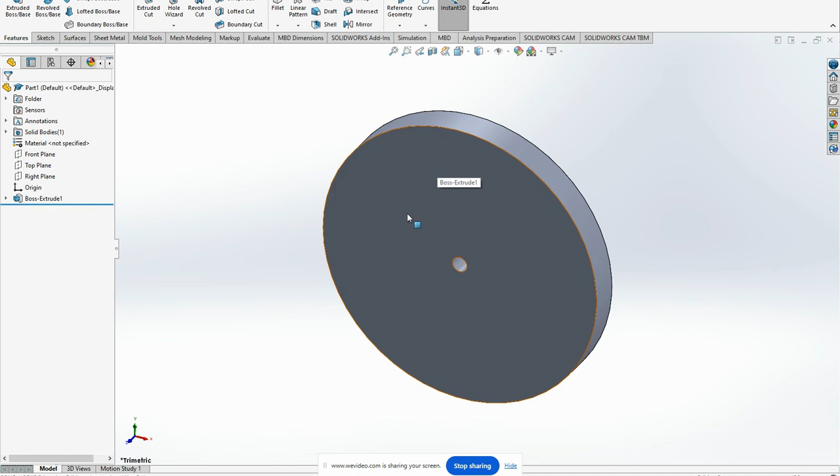Okay, to add marks on your clock face, we're going to start out first adding the major marks. I'm going to click on this and start my sketch. Now the easiest way for me to do this is probably going to be with a corner rectangle, so somewhere up in the 12 o'clock-ish area, I'm going to go ahead and draw a rectangle. It doesn't have to be the right size right now because I am going to size that in.

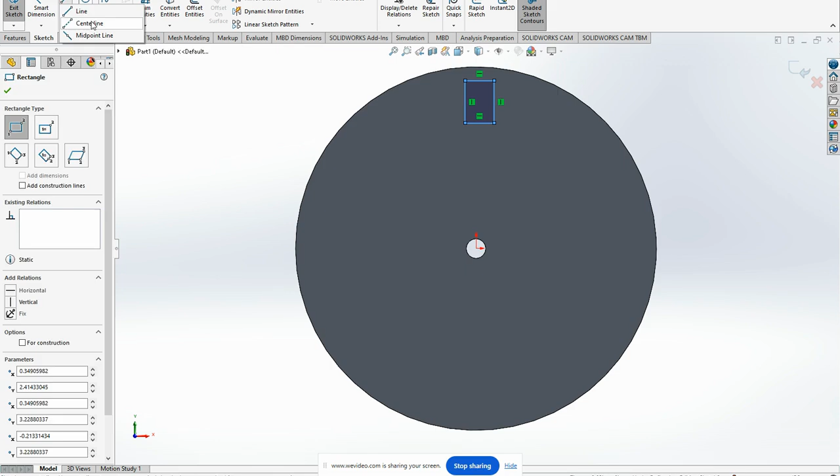I'm also going to grab a center line. My center line I'm going to draw from the origin, or the very center of the clock, up, and I'm going to very carefully select the midpoint. So you might want to zoom in a little bit, but I want to get that yellow point in the middle. That's very important, okay? Otherwise, as I adjust the size, I won't be symmetrical.

Now, as you can see, my line here is not straight up and down, so it's not exactly at the 12 o'clock mark. If I make that vertical, I now have the middle of the box straight over this.

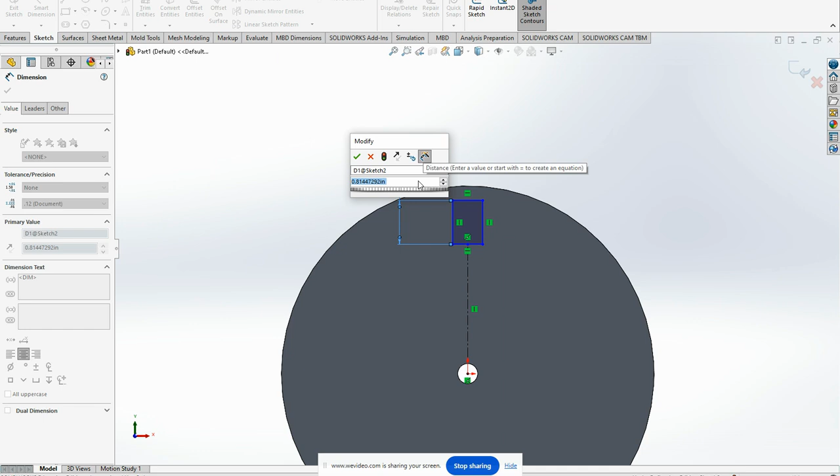I'm going to go ahead and get my dimension tool. I'm going to start out dimensioning this, and we're going to make it 1 inch. We'll see how this looks. And then when I go to set the width, I'm going to make it 1/4 inch, or 0.25.

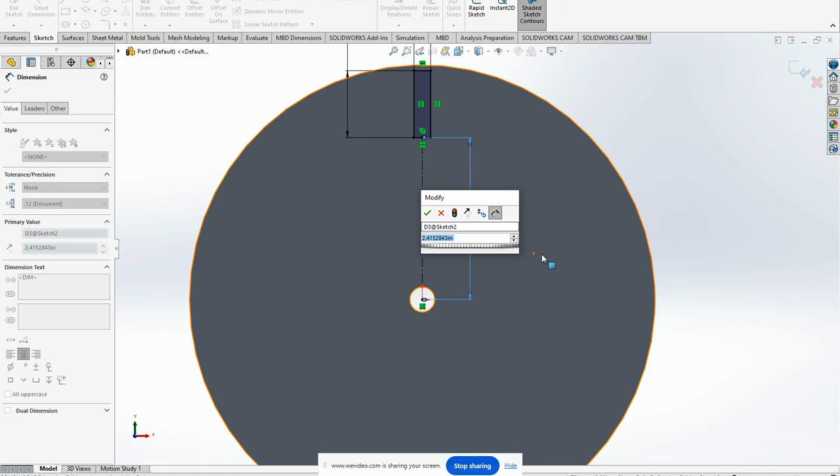Now the last thing I'm going to have is that's really close to the top for me, so I'm going to go ahead and grab this measurement and bring that down. I'm going to try 2 1/4. That looks pretty good, I think we'll leave that there for now. Okay, I can always come back and change it later.

I'm going to go ahead and exit my sketch, go over to Features, hit Extruded Cut, and set my cut depth for 0.125, or 1/8 of an inch. I don't need it in there real deep, but 1/8 of an inch will give you a nice cut so that you get nice crisp edges. Okay, I'm going to accept that.

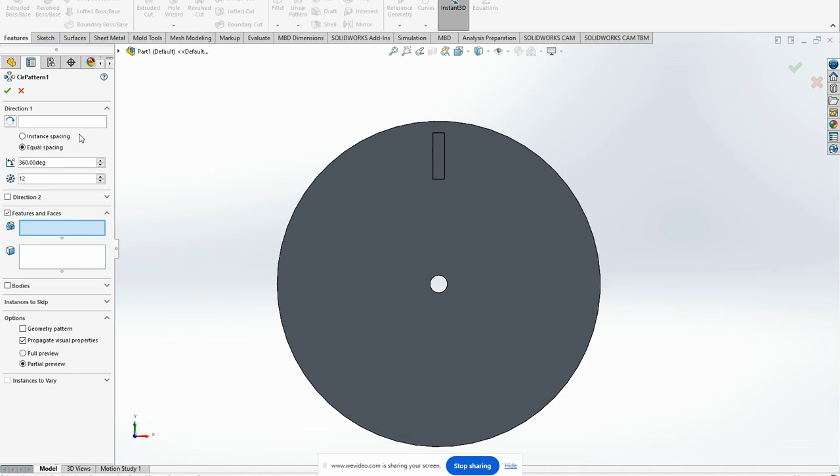Now instead of drawing that 3 more times to get my other major marks, what I'm going to do is use my circular pattern tool. I'm going to go ahead and click either the outside circle or the inner one — it does not matter — under direction. So let's go ahead and get that circle.

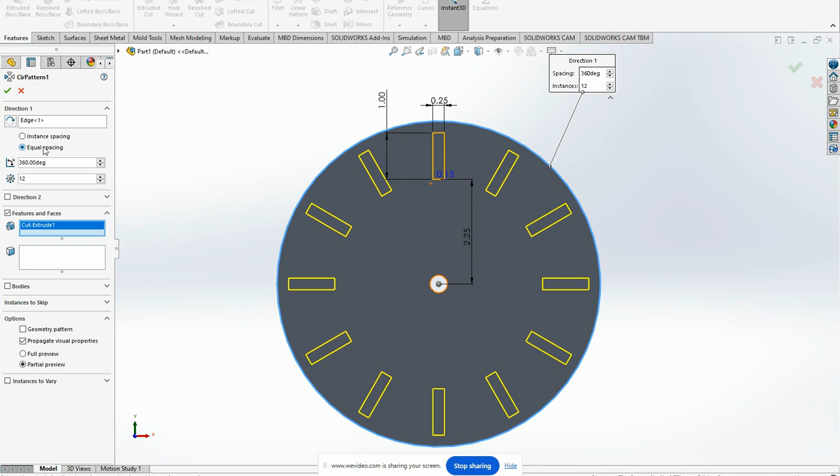Under Features, I'm going to click the cut here, and you're going to want to make sure you are set at equal spacing. Now, if I wanted all my marks to be the same size, I could go ahead and do 12 marks at equal spacing. This time I only want 4 total, so I'm going to get my 12, 6, 3, and 9. Okay, got my preview, that's what I'm looking for. I'm going to go ahead and take that.

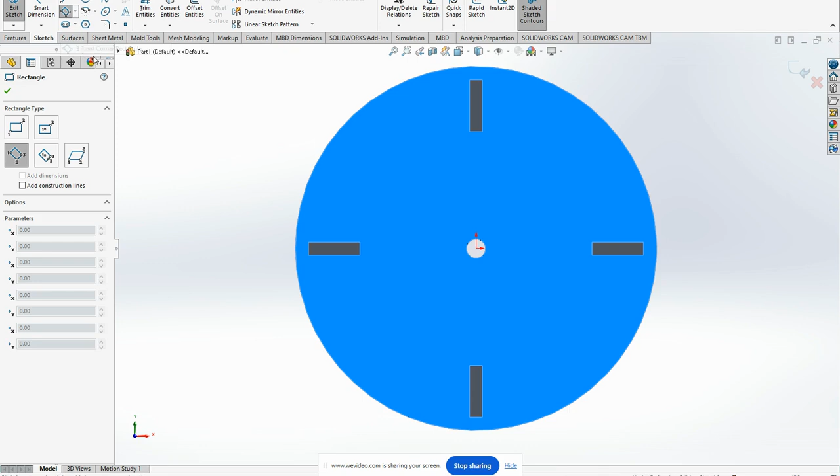All right, now I'm going to create the minor marks. So again, I'm going to start a sketch on this face. I am going to get the 3-point corner rectangle where it is already crooked. That just makes this process a lot easier because now I can draw a crooked rectangle. There. I'm going to do the same process with the center line, where I'm going to draw from here to the midpoint.

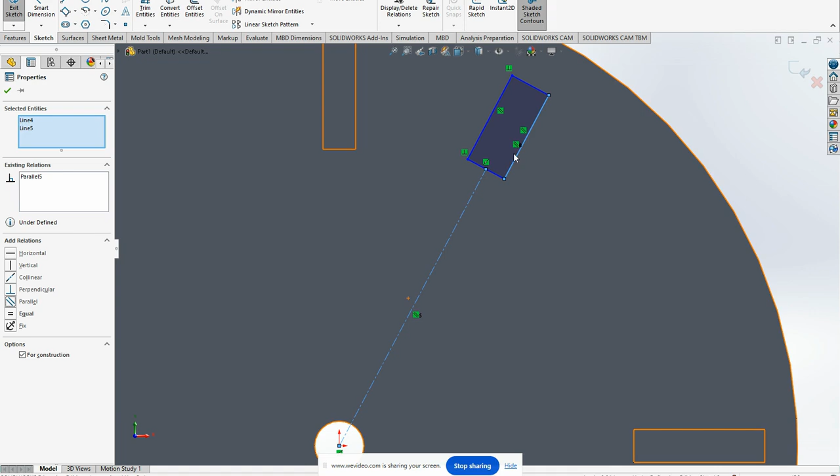Now this is a different step here, but I'm going to select my center line and one of the long lines while holding shift, and make those two lines parallel. Okay, that way they are parallel. As I change this, I've got a nice parallel edge there.

I'm now going to go ahead and size this one up. So I'm going to make this 0.13. I need to make it slightly bigger than my cutter, which the smallest cutter we have is 0.125. So rounding up to 0.13 will give me a line that it'll actually cut. And the height of this, I am going to set at 0.75.

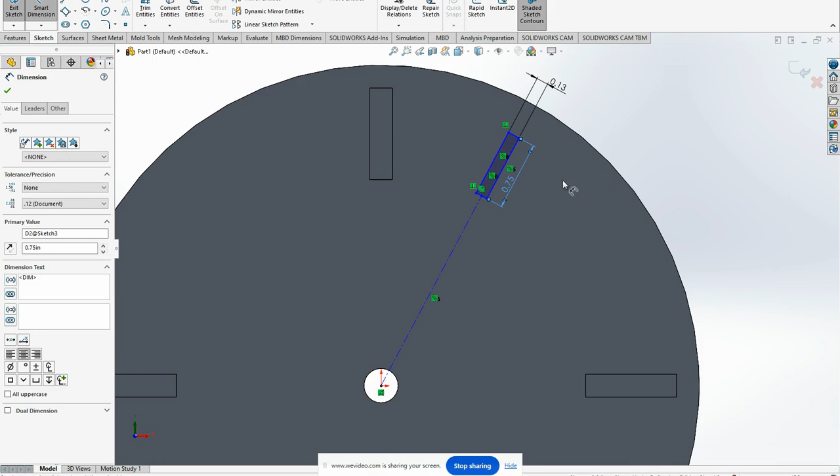And this is again where I can kind of mess with my spacing. But as I select this, I get 2.3 something or other. I'm going to try 2.5. Push it out a little bit. Nope, I don't think that's quite enough. Again, you can mess with this all you want. 2.25. Okay, and I can even come back and change it. You know what? I'm going to go right in the middle. 2.375 is 2 3/8, so we'll go right in the middle with that.

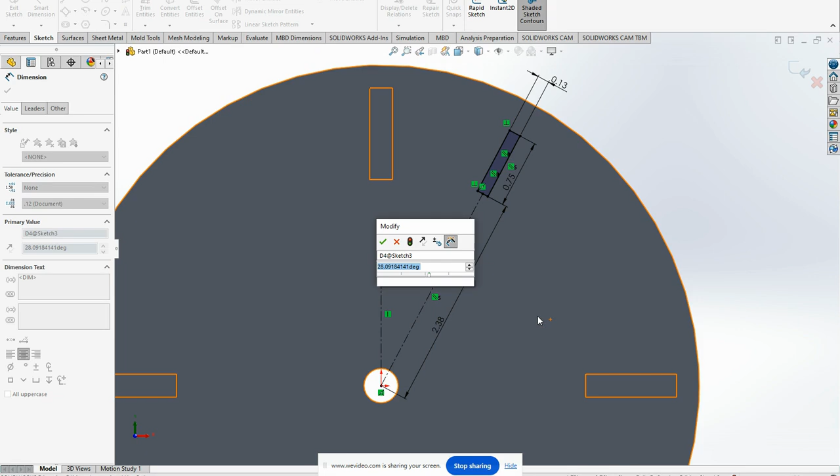That looks pretty good. The last thing I'm going to do is grab a center line and draw a vertical center line. Doesn't really matter how long, because all I'm going to do is dimension this from here to here at 30 degrees. Each of the numbers on a clock are 30 degrees apart. So that's my mark. I kind of like the way that looks now. So I'm going to do the same thing where I extrude cut it in 1/8 of an inch. And now I've got that.

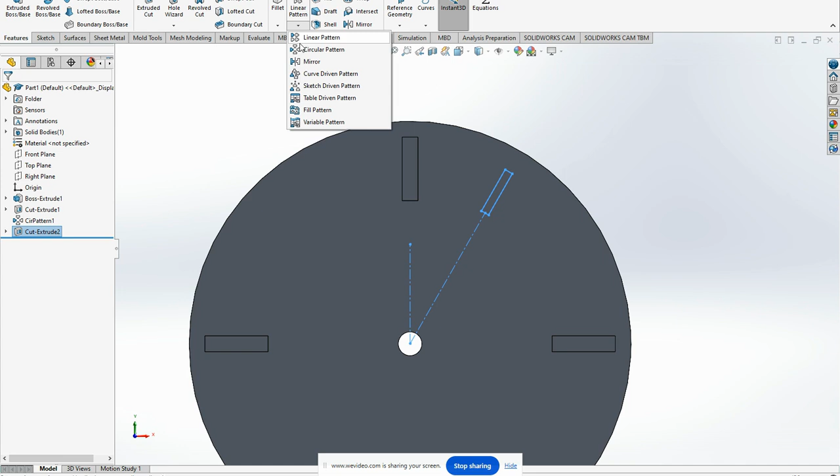Now I'm going to leave it highlighted, and I'm going to go under linear pattern to circular pattern. I'm going to go ahead and pick the big one there. It wants to do 4 equally spaced. Now to get the settings right, this is a little weird, but you need to do 12 at equally spaced. Okay? Now you'll notice some of them end up inside your big marks.

So here's a cool feature of circular pattern. Down near the bottom, there's instances to skip. So if you open that up and you have this highlighted as blue, you've got an instance inside my 9 o'clock mark here. So I can just highlight it and you can see it skips it. So I'm going to skip that one, that one, that one, and the one at the bottom.

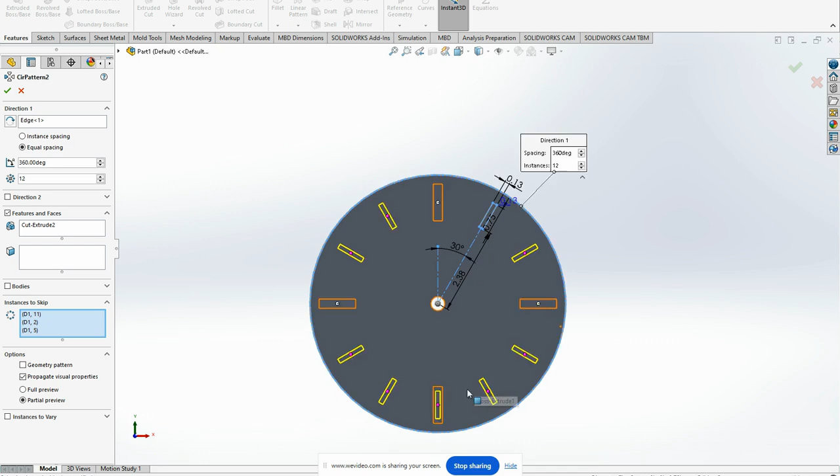Now in this case, there might not have been any big deal. I could have maybe just created it. You know, it's cutting into nothing, it probably won't give me an error. But these are really important to skip, like if one of the marks is deeper than the other, maybe if they're more decorative, maybe if you did dots and dashes, whatever reason, but that's how you skip them. So you can skip some of the instances, and that's a good thing to do.

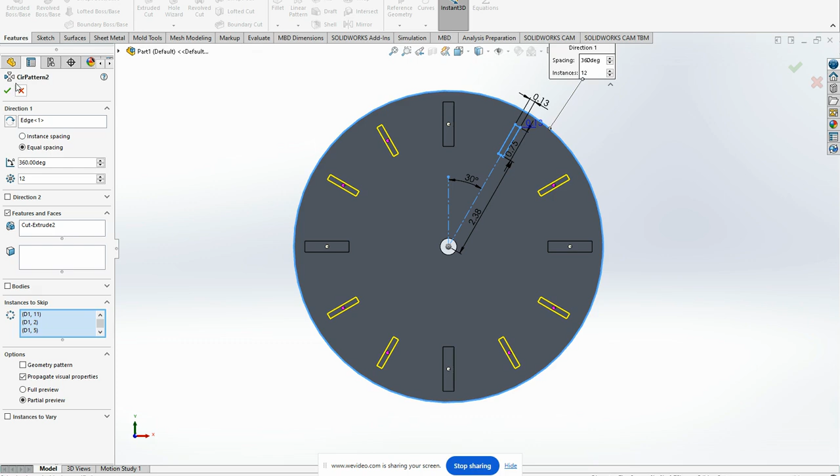When I accept it, I now have this as my clock face. So I've got small marks at like 1 and 2, 4 and 5, and the rest of the way around. And I've got the major marks at the top, bottom, left, and right sides. Okay, so this is a clock face that is good.

If you wanted to make some adjustments, me, if I was making mine, I might make my major marks a little narrower. I might also bring them down a little bit. So those are some adjustments you can make just by going into the original cut and extrude.

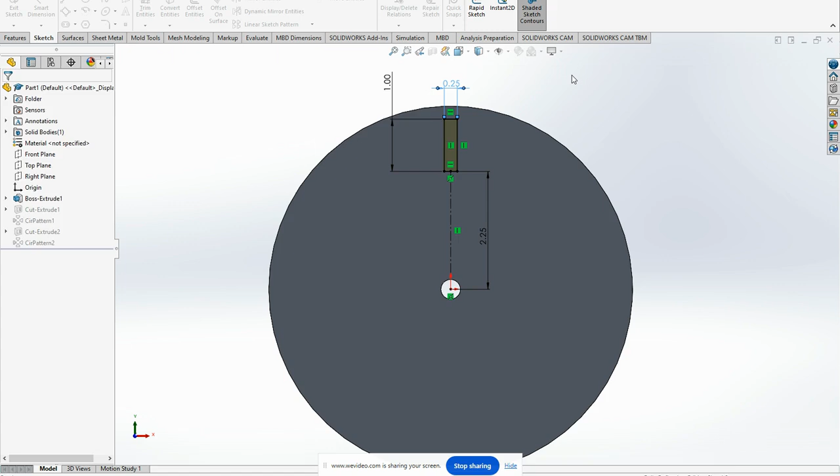I'm going to edit my sketch, and I can go ahead and make this. I'm going to try 0.175 to make it a little narrower, and I'm going to bring this down. So I'm going to try 2.15. And again, I can make those changes, and the minute I exit my sketch, it updates all the marks. So again, you can kind of mess with those, again, on the two original extrude cuts until you get it to look exactly the way you want it.

And that clock face is all done.